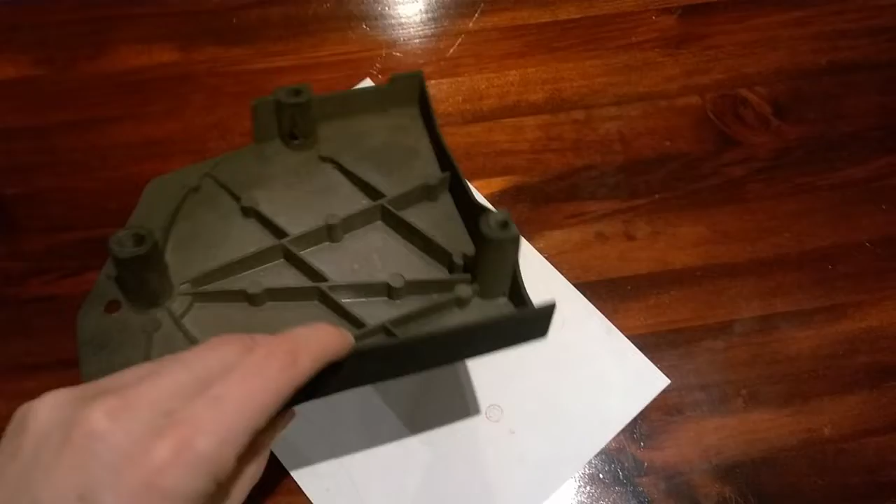The outer side of the cover is a blend of flat and curved surfaces with recession for the bolt holes. On the internal side, there is a web network of reinforcing ribs to improve strength and rigidity. The peripheral faces are trimmed to match the geometry of the motorbike frame and engine case.

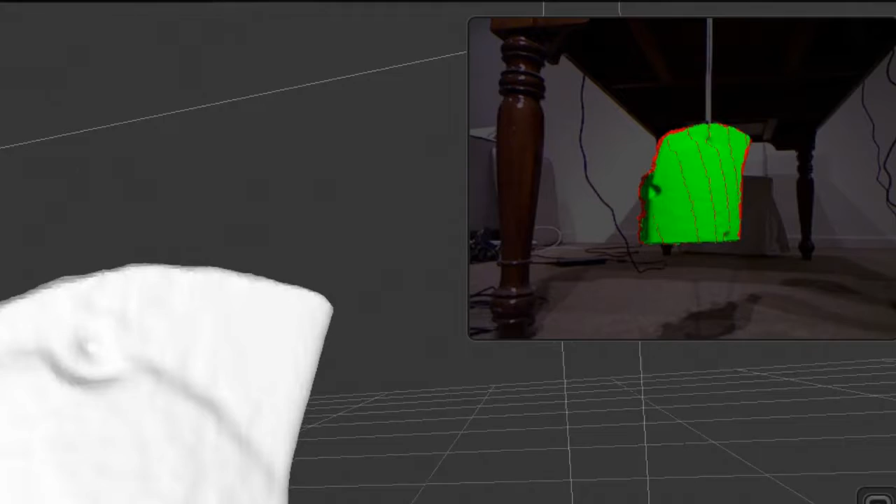We start by doing a 3D scan of the part. In this case, we use a mid-range infrared scanner for its simplicity and low cost. This type of scanner projects an invisible infrared light. An infrared camera captures the reflection and triangulates it to calculate the depth of each point of the part.

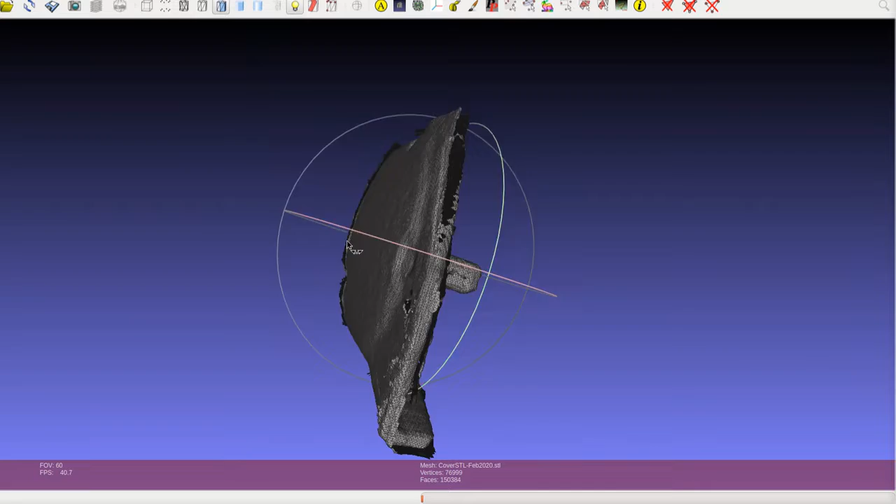We repeat the scanning process to obtain several meshes. The meshes are merged together into one reconstructed 3D mesh. The mesh is simplified before being imported into the 3D modeling software. Some pictures are also used as reference for the creation of the parametric 3D model.

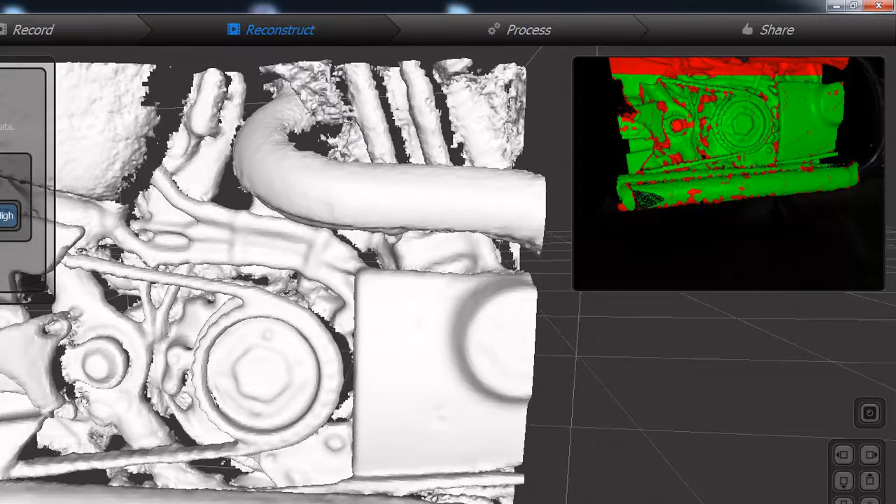The motorbike is also 3D scanned around the area where the part will be fitted. We will use the scanned 3D mesh of the motorbike as it is, without further modeling. Having a 3D scan of the motorbike is very useful to validate the model of the part and to make sure it fits properly in place.

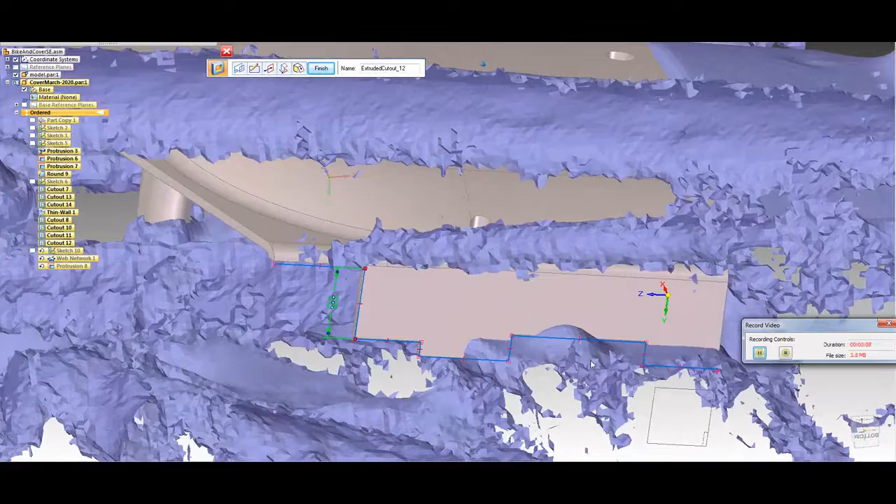Here we simulate a clash between the part and the motorbike. The parametric software makes it very easy to apply responsive changes to the design by just changing the length of one dimension. The clash is now fixed.

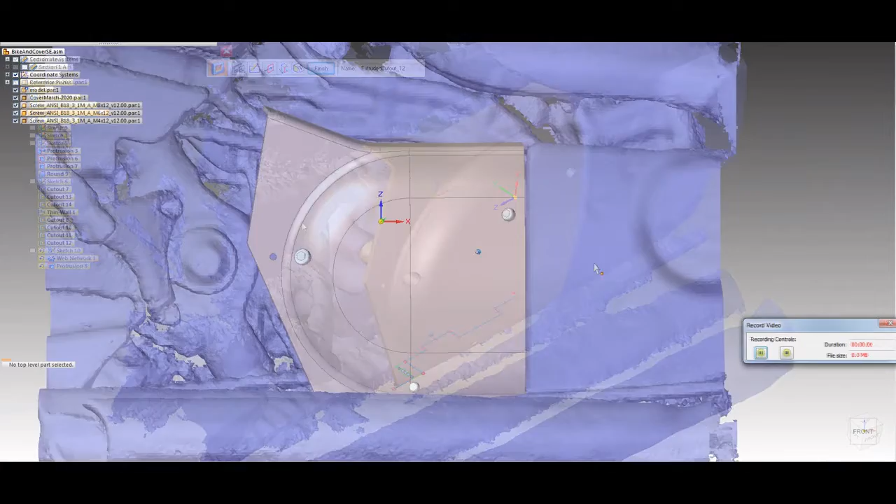Using a circular section view of the assembled part, we can verify the alignment between the bolt holes on the part and the corresponding holes on the motorbike's frame. The clearance between the cover and the sprocket and the belt can also be verified.

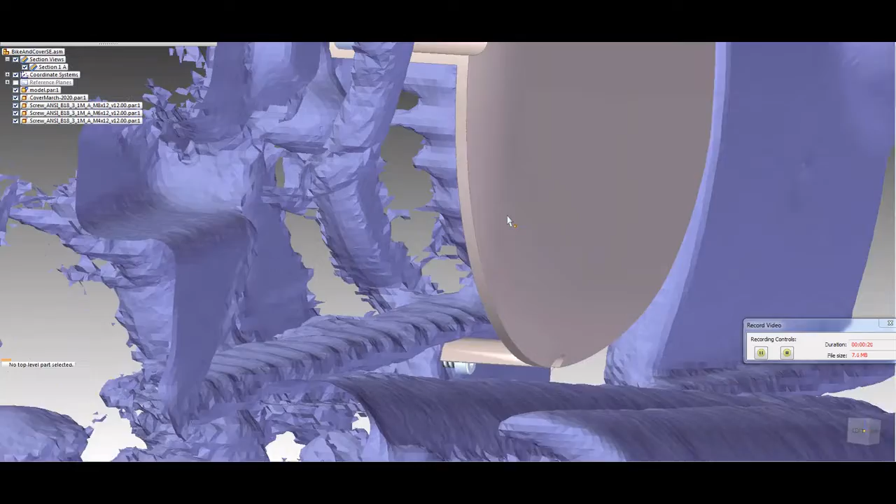The parametric 3D model is created and can be exported into different file formats. It can be 3D printed for final testing on the actual motorbike before manufacturing. We now want to create a custom sprocket cover. A color transparent disc is bolted on the metal assembly.

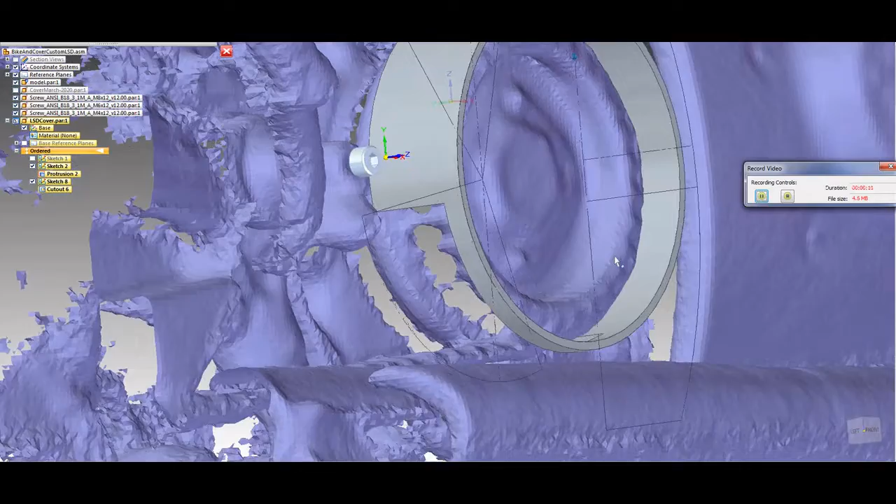The main ring-like component is derived from a section of metal pipe. Its dimensions and openings are designed directly on the motorbike's model. This allows us to immediately determine the correct position and clearances.

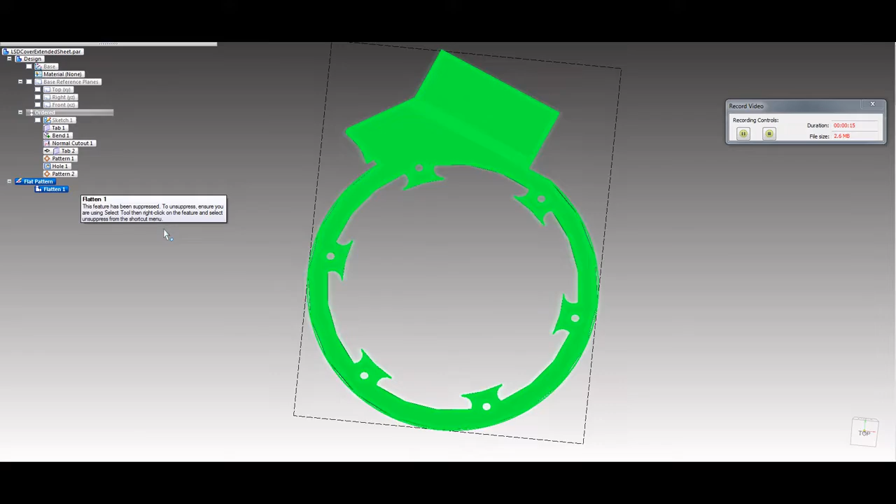The disc retainer is made of sheet metal. We assume that the metal sheet will be first laser cut and then bent. The modeling software allows us to unbend the model to obtain the flat profile. The type and location of the welds can also be modeled.

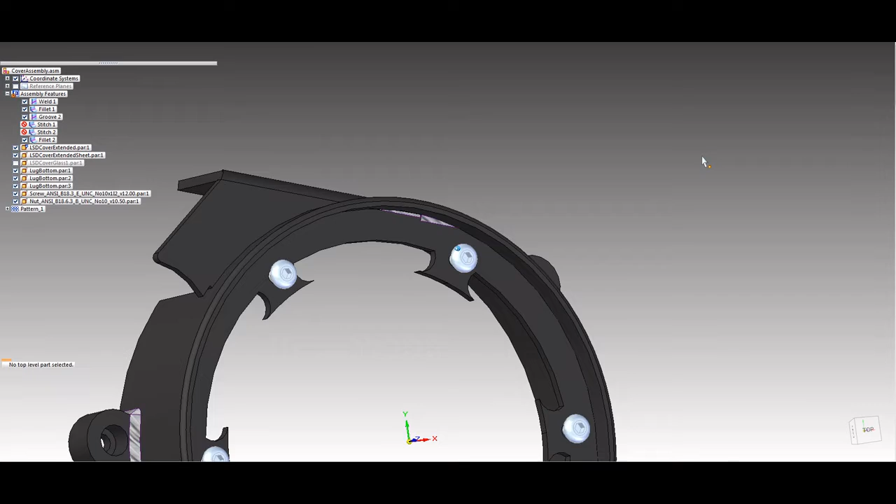Obviously, the assembly will be painted after being welded together, but here we want to make the weld location more visible. Once again, the parametric software makes any change to the model very easy. The lugged supports are positioned and included in the model. The welds are all placed, the model is now complete, and we are ready to produce fabrication drawings.

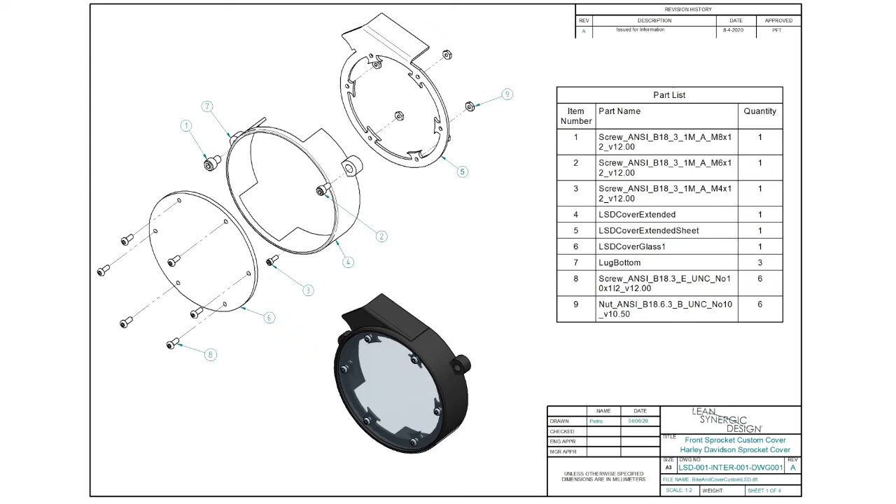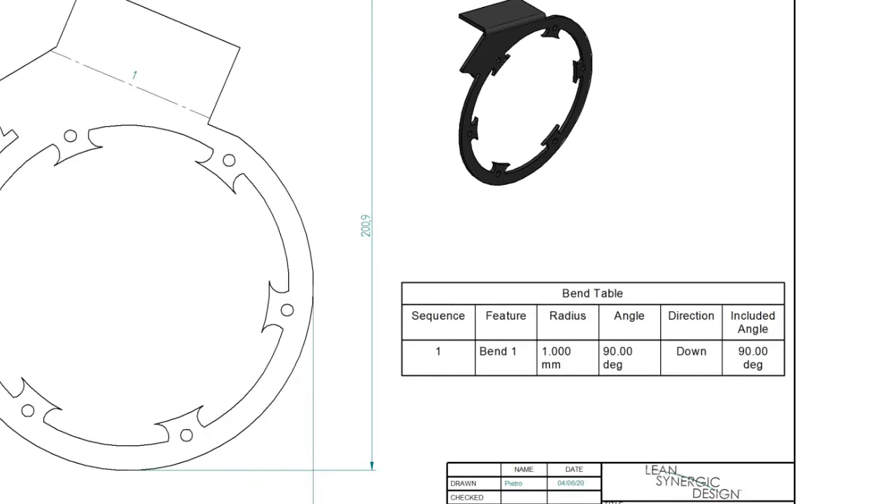The retainer is shown in both bent and unbent configurations. A bend table is included and lists the sequence and specification of each bend, only one in this case. This can be exported to DXF and DWG file formats for easy input into the laser cutter controller.

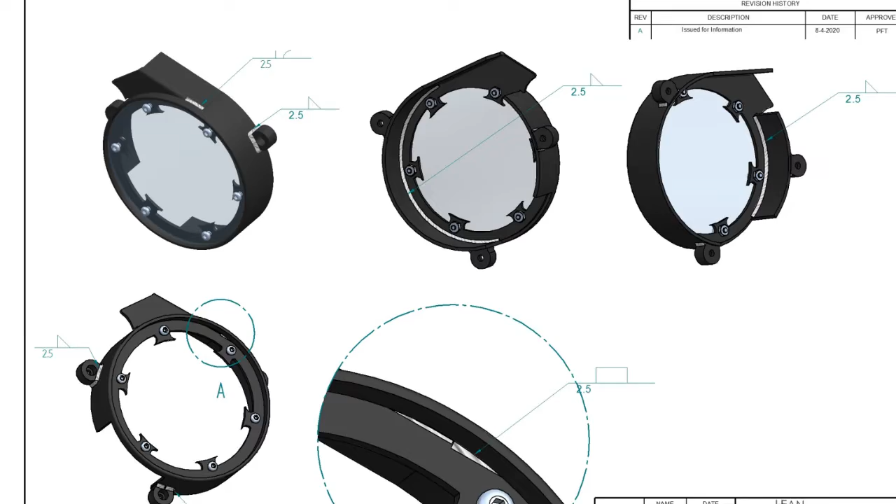A welding drawing shows type, extent and location of each weld. The drawings of the new custom part can now be issued to any workshop for pricing and fabrication.